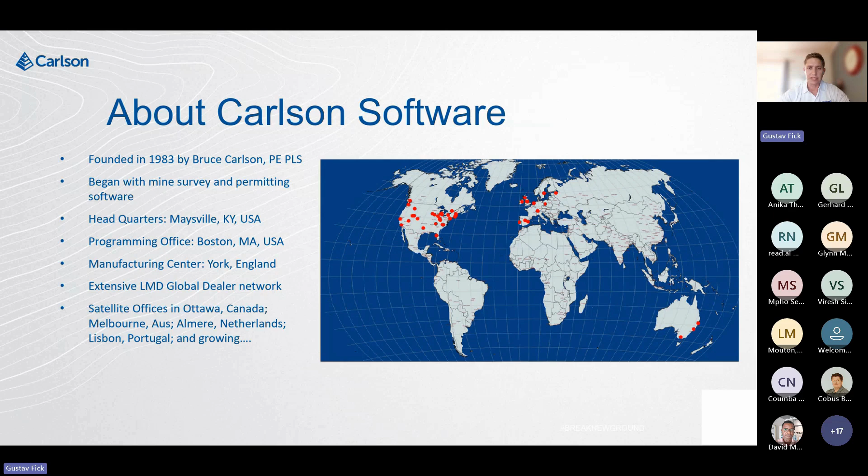We pride ourselves in having an extensive LMD global dealer network, of which we are very proud to be associated with Optron. And then we've got satellite offices scattered all over the world. The big ones are really in Canada. We've got an office in Melbourne, Australia, and then in the Netherlands, and Lisbon in Portugal. And hopefully in the near future, we will see some more growth here as well.

So the Quarryman Pro, it's still available. The Quarryman Pro has been around for quite some time, but it's still being used today, mainly in quarries and also on mine sites where long-range scanning needs to take place. And this is really the key feature with the Quarryman Pro. You're looking at about 1,200 meters that it can scan.

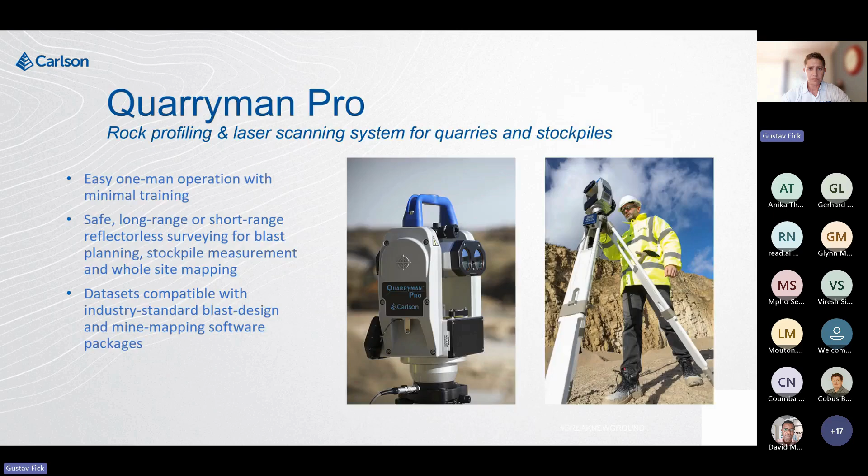The VS Plus, which is our Void Scanner, as most of you might know it, is typically used when you have an underground cavity and you need to map the cavity and work out what the volume is. What you do is you take the Void Scanner or the VS Plus, you mount it on a boom, and you deploy it into the cavity.

You can now georeference your scans by measuring the back and the front of the boom. So when you perform the scan, that data is already georeferenced if the data was available and it was measured prior to the deployment. You can also do it after, giving you some flexibility in terms of when you do your data capturing.

The big benefit really is having that data in real time. So after you've performed your scan, you can already calculate what the volume is. And I'm going to touch on that a little bit more when I get onto the C-ALS HD, because they basically use the same software, which is our Carlson Scan software package, where you can now interact with your data and then do the volumetrics on site in real time.

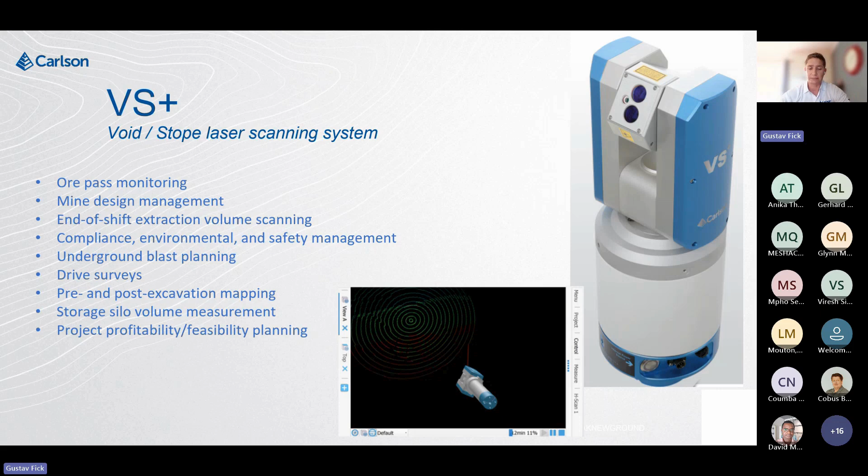So the focus products will be the Boretrak 3 and the Boretrak 360. The latest edition is the Boretrak 360, as you can see there on the right-hand side. These are our drill hole deviation measurement tools. We've learned a couple of lessons over the years when it comes to drill hole surveying, in terms of the use of it, what to do, what not to do.

And I would say this is definitely one of our flagship products, just purely because at the end of the day, mines need to measure what they drill, and depending if they're using contractors or doing it themselves, obviously the aim is to mine as close to the design as possible. And that's really what I'm going to touch on, just in general.

So what is a Boretrak? I've dotted a couple of points down. As I've mentioned, it's a drill hole deviation tool. It's mainly used on underground mines. It can be used on open pit mines as well; you've got different options in terms of deployment. Obviously with open pit, you will do downhole deployments. And if it's underground, you have the option of doing downhole, uphole, or side deployments also.

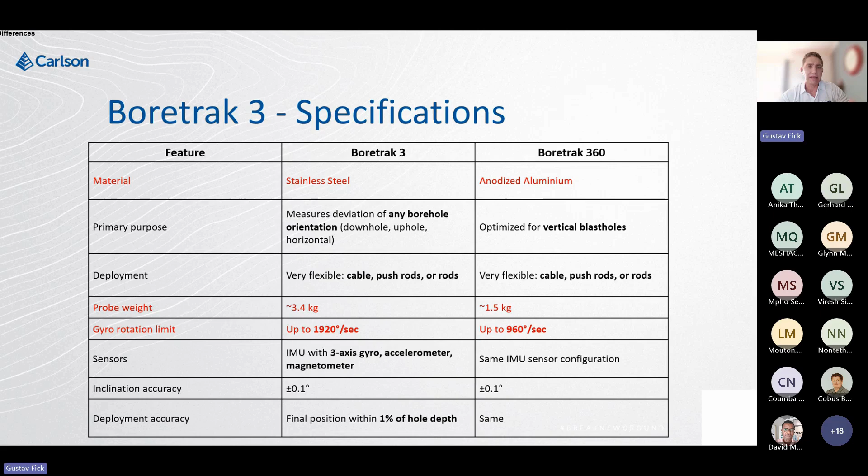So that's really kind of the big differences between the two. The big reasons, and that maybe just brings me to my next slide, my apologies for that. This is really where the big question is when to use which one.

So based on what I've mentioned, and I'm going to quickly just run through, the Boretrak 3, because of its IP rating and also the material, can really be used in all different environments. Where the Boretrak 360 can still do different deployment options, uphole or downhole. But the big thing is you need to be mindful of the environment that you're working in, and where you do the deployment, if production is really key, the Boretrak 360 really makes for a good option to use.

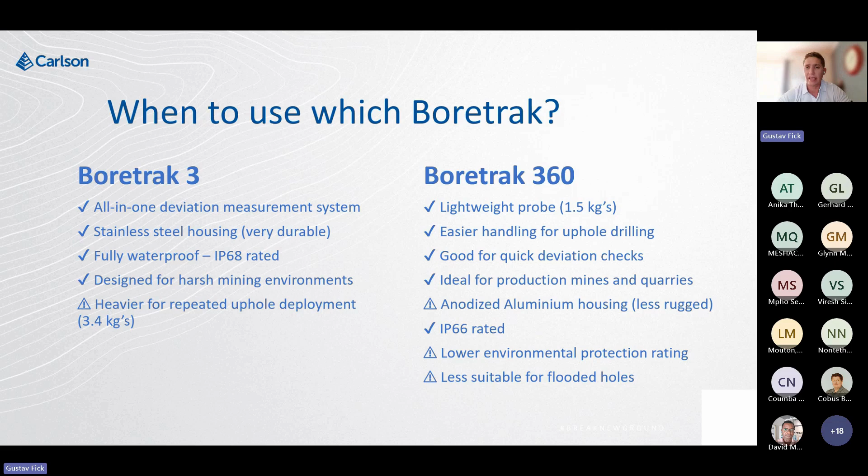So all in all, we've got different options depending on the environment that you're working in, depending on what your key focuses are. We really have a tool that will fit your needs. And this is really the big reason why we manufactured the Boretrak 360.

The typical deployment accessories, I'm going to start from left to right. On your left-hand side is your standard 50-meter cables for downhole deployments. You will see it's marked every meter. Then we move over to the rod stack. You still get the rod stack, downhole and uphole versions. The difference in the uphole version is that it's got hinges that lock, so that when you push it vertically, it doesn't bend. So that's the key difference between the uphole and the downhole rod stacks.

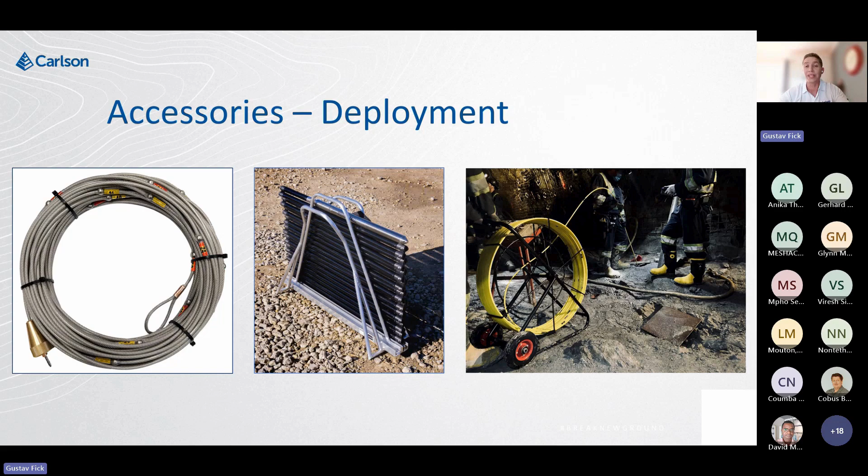And also we're seeing the demand picking up for the semi-rigid reels, where you can do uphole and downhole deployments, and especially linking this up with the BT360 makes for quite an easy to use system, compared to the Boretrak 3 with the rod stack. So these are the typical accessories, depending on how you want to do your deployments and the environment that you're working in, and this is typically how we would help and guide you to put together the best solution going forward.

Also, a topic that's not really talked about a lot is the need for centralizers. The reason for the centralizers is to avoid having the Boretrak zigzagging inside of the hole. So depending on the hole diameter being drilled, we have different options, centralizer bows that you put on your Boretrak. For example, if you have a 70 millimeter diameter hole being drilled, the rule of thumb is always to use the previous size that's available. So for a 70-millimeter diameter hole, opt for the GT10.

That will give you a total width of the probe's diameter, 40 millimeters, plus the spacing of the bows, which is 10 and 10, which gives you 20. So in total it will be 60 millimeters. You put that on, and then you do the deployment. This helps reduce that zigzagging effect inside of the hole. Also, what's important when you do your deployments and take your readings, which I will touch on in my next slides, is to make sure you keep the unit still.

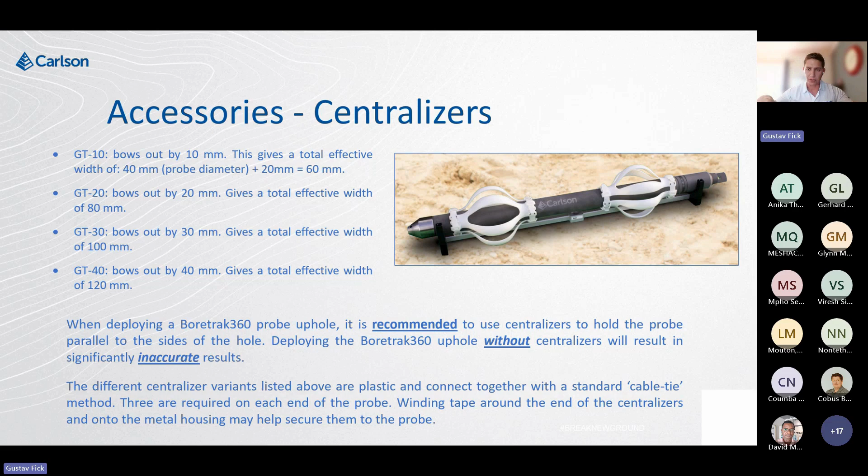The centralizers connect together. You can tie them with cable ties, and then off you go. Also, the rule of thumb is to use 3 on the Boretrak when you do your deployments.

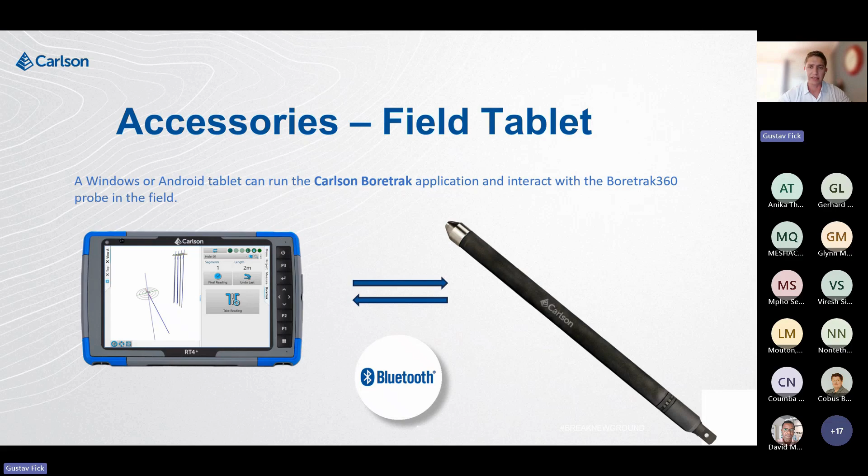Then the accessories: part of the system will be a tablet with the Carlson Boretrak software on. There's a Bluetooth connection between the Boretrak and the tablet. We've got options for Windows-based and Android. When you do your deployment and the Bluetooth connection is lost because of the deployment, as soon as you bring the Boretrak back within range of the tablet, the data will be uploaded. So that's typically how the communication is established between the tablet and the Boretrak.

Just to quickly touch on the field workflow, so that you get an understanding of how it works. Typically you would align your Boretrak to the collar position. If you've got a line of different holes, you can line it up with the front and the back collars. And I'm now especially referring to ring drill holes that need to be scanned.

So you can line them up, and then you can start with the aligning of the gyro. That will bring me to the next step. So firstly is just aligning it, keeping it basically on a stable surface. There you can see typically what the horizontal tolerance should be. You will align it. You will click on Align Gyro. It will take about 3 seconds to align.

And then from there on, depending if you want to continue and just capture the points or key in the front and the back collar positions to determine the heading to get your data georeferenced in the field already, you can do that. Or you can also do that afterwards, after you've done the data capturing. Once you're done with this, you can click on Finish. Once you've clicked Finish, the lights on the Boretrak will turn green, meaning it's ready to do the data capturing. And then from there on, you can start with your deployment.

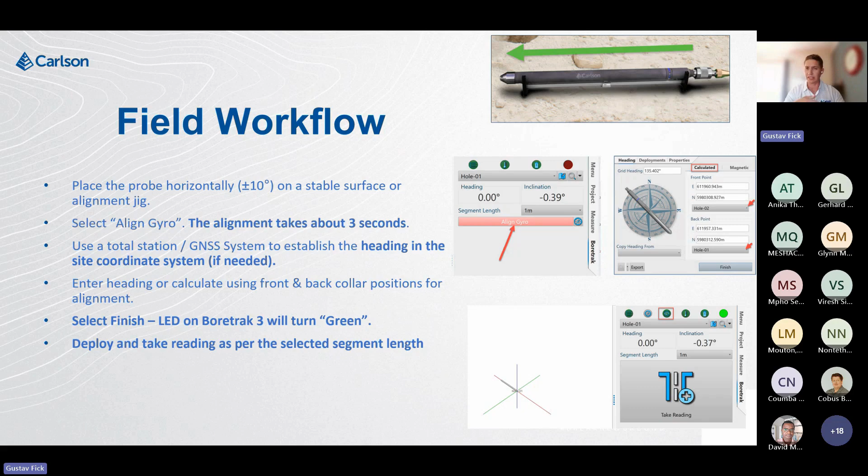So what's also important when you do your deployment, you need to specify the segment length. So if it's going to be 1 meter or 2 meters, and then you just basically deploy according to that. Just typically what you can expect and how the interaction with the Boretrak software can work.

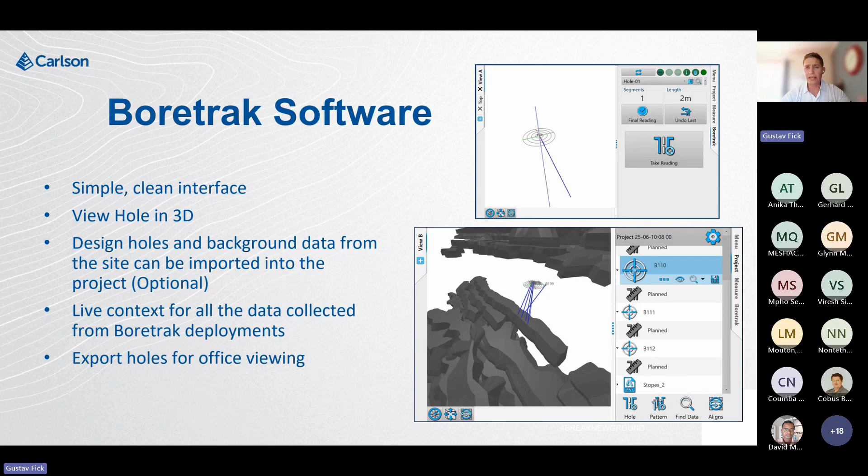This is where you can now import models. When you do the deployments, you can already see where the drill holes are drilled in relation to your models. You can import the designs also beforehand, before you actually go to the field, to already see what those deviations are. So really giving you a lot of flexibility in terms of data capturing.

The next thing also is when you've got point cloud data, and this is really more just from a QA/QC perspective, working with models inside of your Carlson Boretrak software. You can also import point cloud data if you need to just quickly see how your drill holes are lining up with your georeferenced point cloud. You can do that as well.

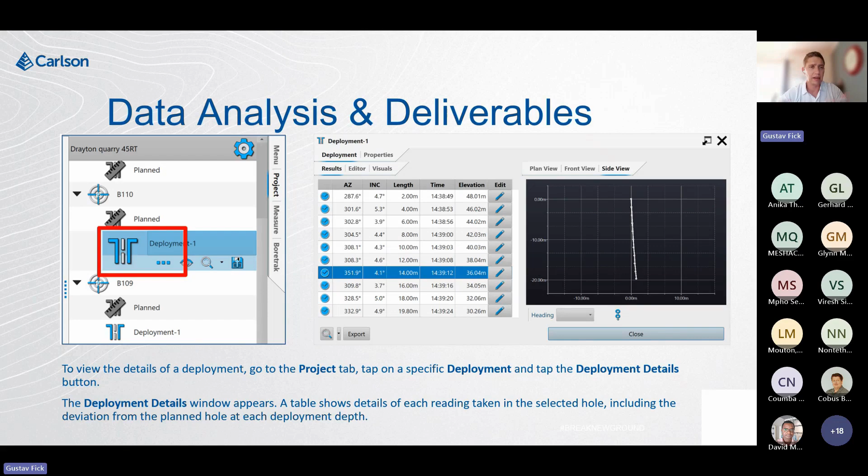Then once all of that is done, you can now perform data analysis and then generate your deliverables. This is typically just how you can interact with your different deployments. You can take hole for hole, just visually see what it is. This is also the step that you would follow if you need to key in the collar positions after the deployment was done. You can interact with the data like this and make the necessary changes before you generate your reports and then also your deliverables.

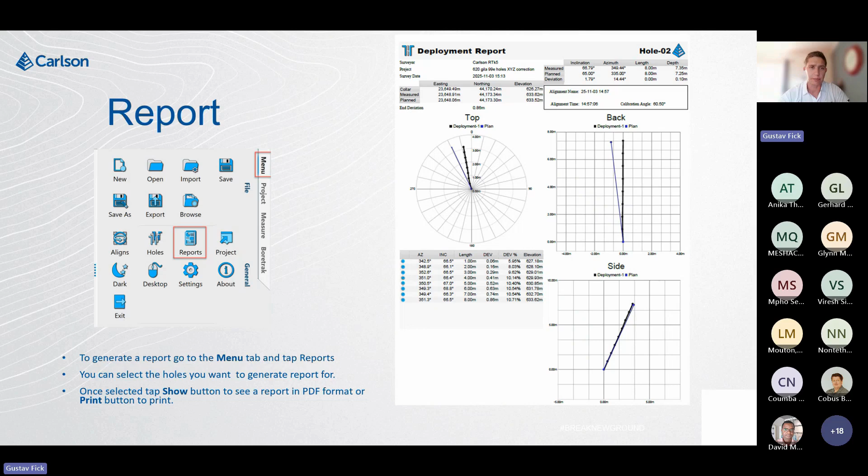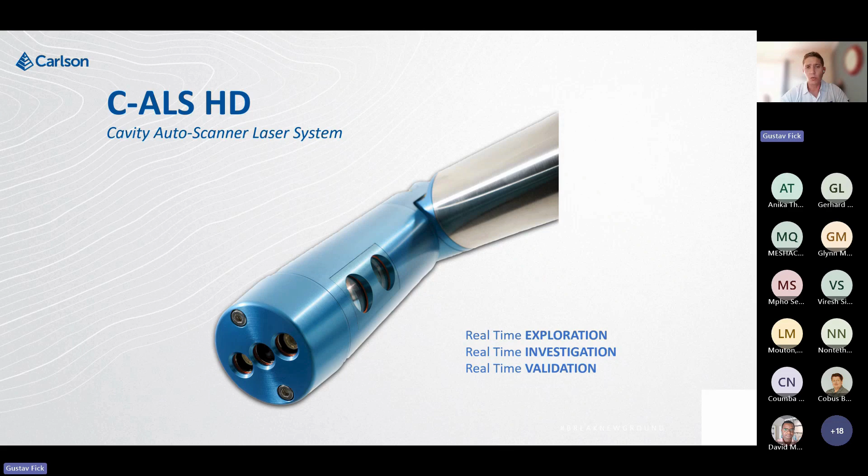Then the next product is the C-ALS HD. As you can see there, real-time exploration, real-time investigation, real-time validation. And this is when you have inaccessible voids that you cannot get access to. Let's say typically you've got a void underground, but you can get access to that void through drilling a drill hole, getting into that cavity.

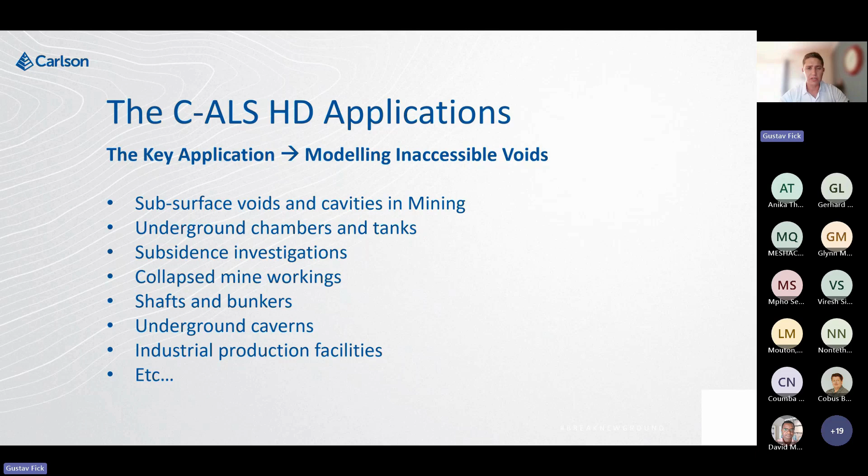Now you can deploy the C-ALS HD unit into that drill hole so that you can see when you enter that void and then perform the necessary scan work of that void and determine what the volume is. So this is just typically where a C-ALS HD would be used. Obviously, if you have cavities underground, you can do horizontal deployments as well. So you've got options. This is just to sketch a typical scenario when this would be used.

So I'm just going to quickly touch on, okay, what is a C-ALS HD? And once again, there's been a lot of different series of the C-ALS. Back in the Renishaw days, where it all started, we had different versions of the C-ALS. Now we've got the C-ALS HD. The HD is really that high definition camera that you have in the front of your nose cone.

But it's a scanner, it's got an inbuilt camera. It also has lighting capabilities so that you can see better what's happening underground. And it's got an IP67 rating. So this is just some of the key specifications that the C-ALS HD system basically comprises of.

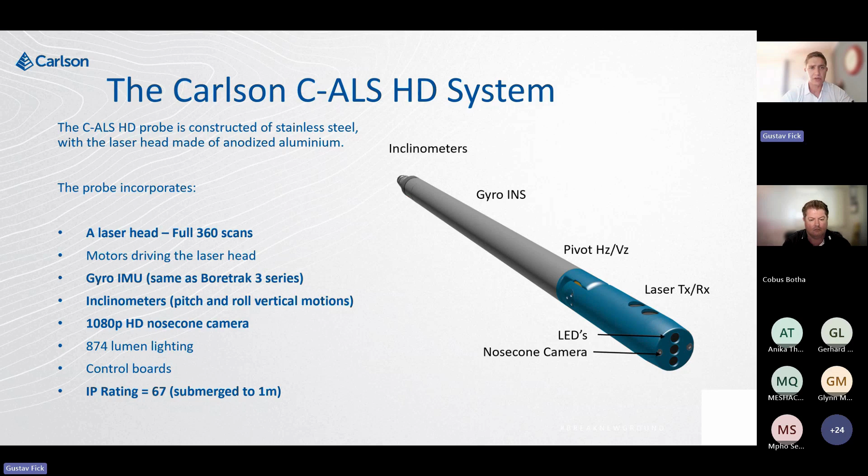Then I have a quick video that I just want to quickly touch on because this really explains it very nicely, and this is just to put some visual context to it. So if you've got that void, it doesn't matter in which direction it is. When I say direction, you can do uphole deployments as well, you just need to be mindful of the weight of the system. But you drill that drill hole, there you can see just the size of the diameter of the C-ALS.

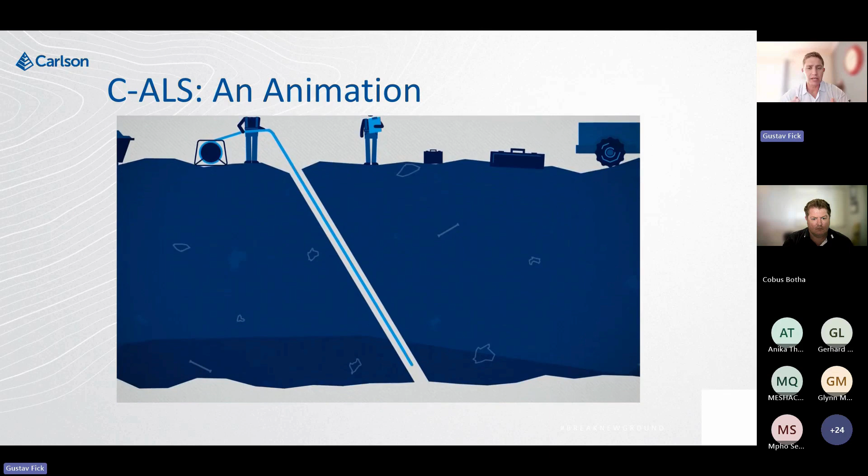You will deploy that in. It works very similar to the BoreTrak, the way of deployment, and it's got built-in BoreTrak technology as well, built-in IMU. So there you can see you deploy it inside of the cavity. It performs the scan, it maps it out, and then that's how you can start interacting with the point cloud data inside of the Carlson scan software.

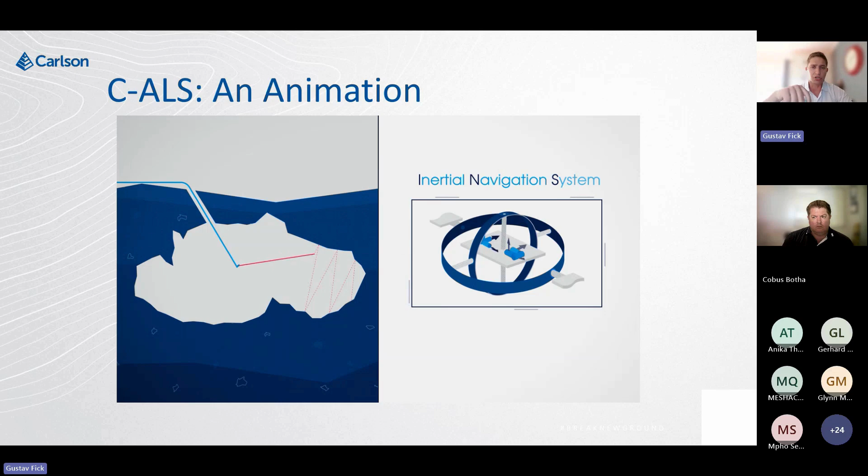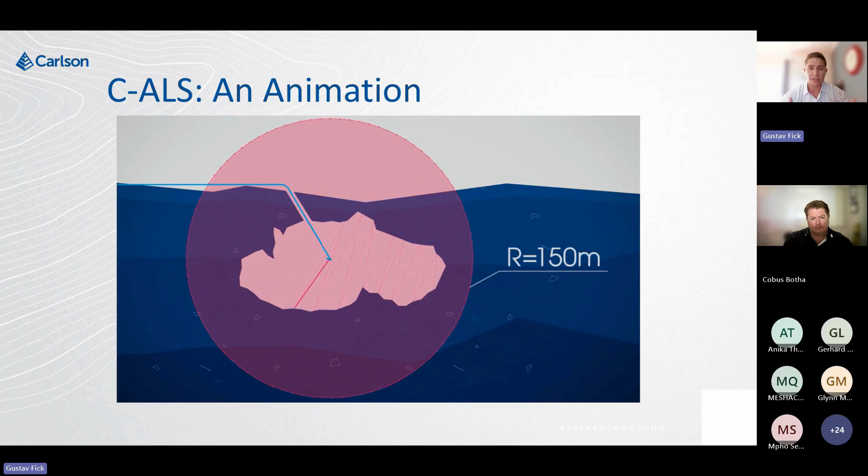So what it basically shows here is just how the scan works. You've got horizontal scans and you've got vertical scans that will now give you that full 360 view. Also something to be mindful of is blind spots. So depending on the size of the void, you might need to consider doing a second deployment. Once again, once you've done the scan, you will already have a good idea of what your next step should be.

Right. I think this really just covers what I wanted to touch on. The new accessories on our C-ALS HD: for those who are familiar with the C-ALS from previous use cases, you would pick up the cables, you don't have those markers on the cables, but those cables are still available. We call those our node cables, and this is the control cable, this yellow control cable here.

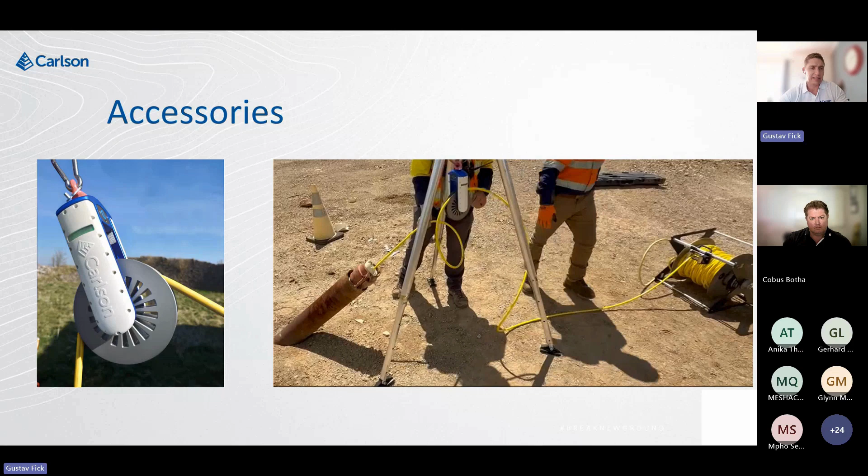But we've also introduced a deployment counter. What the deployment counter basically does, it works with a nodeless cable, what you can see on the screen. And this basically does the measurement for you as to how deep you are deploying. So the whole idea here is that it makes the data capturing process easier, where you don't have to remember which nodes you actually had to take the measurements on. So this is really a new way for us to make the data capturing process a little bit more streamlined.

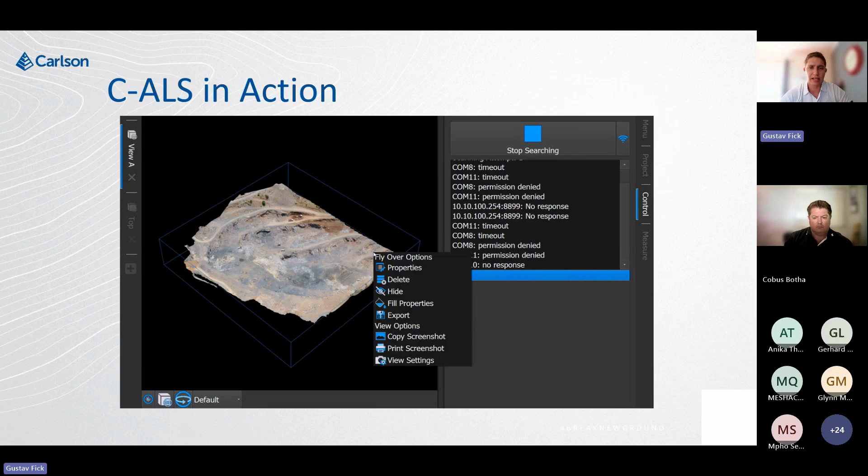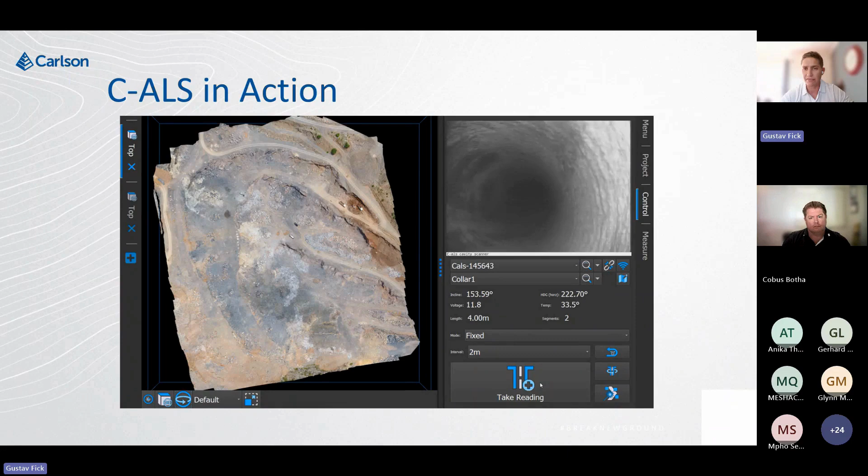Then my last one, before I wrap my part of the presentation up: how does it work? Typically when you need to do the actual data capturing, as I mentioned earlier, you've got a horizontal and a vertical scan that will give you the complete 360 coverage. So when you connect, it's connecting to the C-ALS HD, just doing a quick system diagnostic. This is typically what you would see here. That's the live feed coming from the nose cone of the C-ALS HD. So the nice thing is you can see and track what's happening.

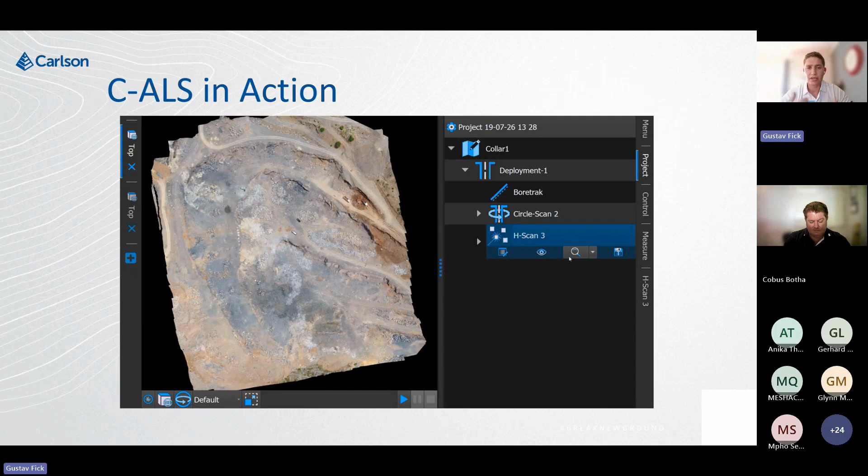When you get into that void, you will see when you're entering it, to prepare you for that scan. So this is just the different scans that have been done. You can now start interacting with that. What you see here is a point cloud that has been preloaded; you perform the scan, and then you can already measure your data to determine what the total volume is.

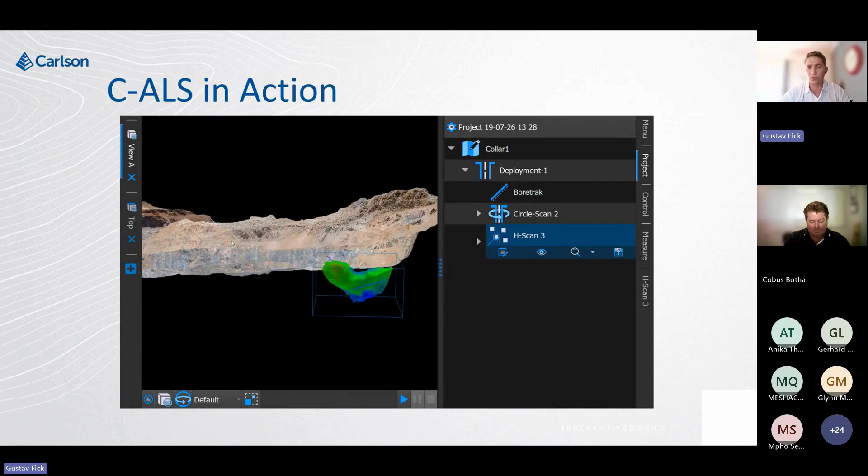Thank you. That's basically my part of the presentation. I'm now going to hand over to Cobus again. Thanks, Gustav. That was quite nice. And Paul, I'm going to hand over to you, and you can take us through some case studies, please. Yeah, thank you. Let's go here. Thank you, Cobus. Let me just share my screen. Can you see my screen? Yes, I can. Okay, thank you very much, and good afternoon to everyone.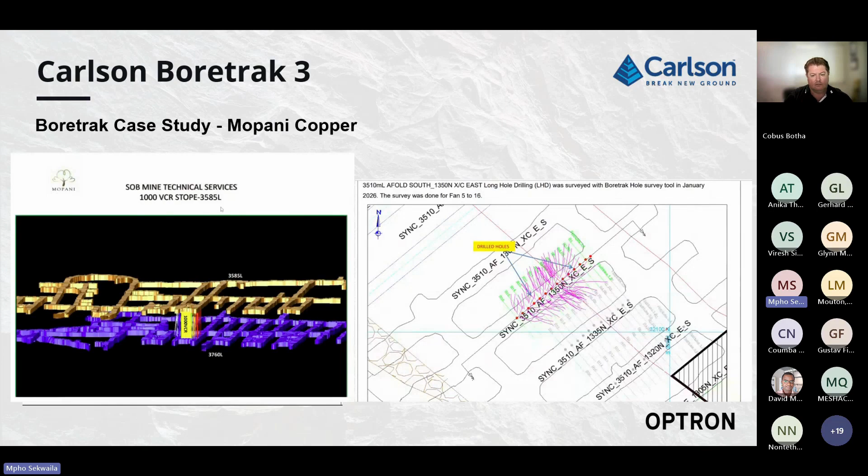As you can see on the right hand side here, they have the design in 2D. The green ones are the planned or the design, and the purple ones were the Boretrak hole as drilled, right? And as we move on, I'll go through those key benefits in detail.

The next one here, as you can see on the right hand side, they have a certain target of holes that they need to drill per month, per ring, right? And before they were just measuring with the tape, and the tape, yes, it is good enough when you measure. If they just say this hole is 50 meters, you deploy the tape, you got 50 meters. But you know, as we drill, we are not getting 50 meters per se. We still want those deviations, those millimeters, those trajectories, the geometry of your holes.

As you can see on this one, the planned meters per ring was 111 meters, but the actual drilled meters was 98.6 meters. So on this one, not to speak bad about others, but if you do your planning properly, and remember, you are paying per meters drilled per month or per ring per section per day. On this one, it means there was a shortfall of meters drilled.

And if you look here on the right hand side, you've got the outline blast line where everything, when it is planned, must be drilled to this blast line. And after the next slide, I will go through the impact of this one. If you look here, this one, they were under drilling. On this one here, they were over drilling and under drilling, which is not required. You have to be on par, nothing more, nothing less.

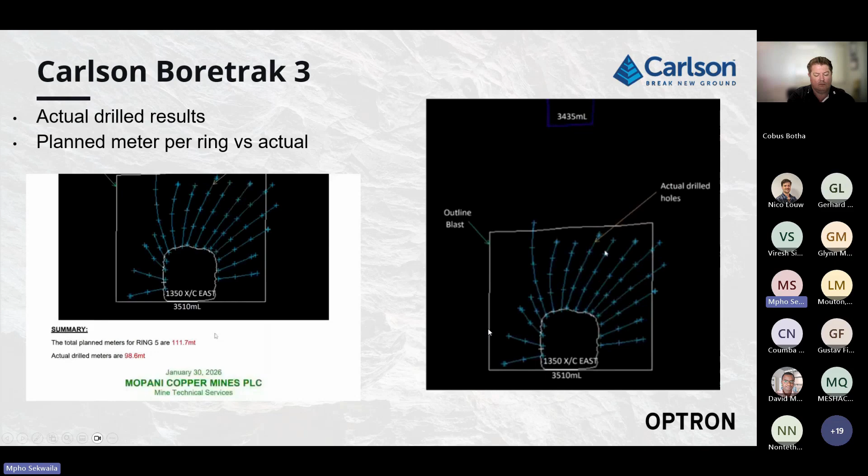Through this picture here, we've got two scenarios. The first one, the benefit of using this Boretrak and how it helped them: you can detect the problem areas. As you can see on the right hand side here, they did not drill up to the parameters set out. The planned one was 134, and this red line highlighted here will be one of the problem areas. And with the Boretrak, you can put preventative measures in place before you deploy the explosive.

And if you look on the right hand side, we've got areas where they've missed drilling this hole here, and we've got another one. Yes, they did not miss, but there is a gap because after a certain length, the geometry or the trajectory of the drill started drifting this side and this side.

And what will be the unpredictable results? If it is an uphole deployment, you might have hanging ground where it was supposed to be drilled. And on the right hand side, if it's over drilled, for argument's sake, say the reef was going along this side. Now if you over drill, after blasting everything, even the waste rock, will fall, which is not what is required.

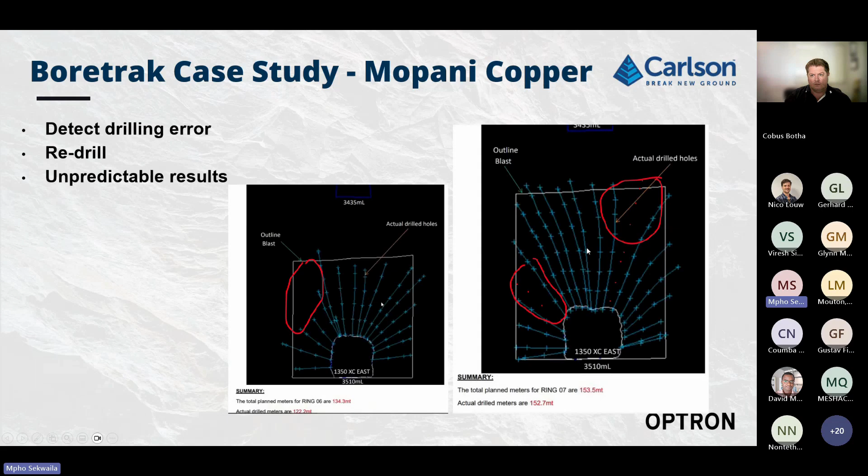Then on this one, if you check the pictures on the right hand side, the red ones are the drilled positions, and the rainbow ones are the planned ones. As you can see, there's just a red line. On this one, they've almost done a perfect job, but they still have a few things on this side, and on this side there were those under drilled. And what will be the impact? How will this impact your results or your productivity?

First things first, you will have uneven fragmentation. What do I mean by that? If everything is not blasted according to the design, your rock fragmentation will be too big. When they planned this design, they know if it's 2 meters or 5 meters apart per hole. The rock fragmentation might be the size of a tennis ball, but if we have scattered ones, we've got this one and they've missed this one here.

Now, after blasting, you stand a chance of having bigger rocks, which will delay you when you are picking the material, when you are loading the material, and it will even increase your rock dilution. When you've blasted, the rocks and the ore are mixed. When crushing, even when processing, it will take time.

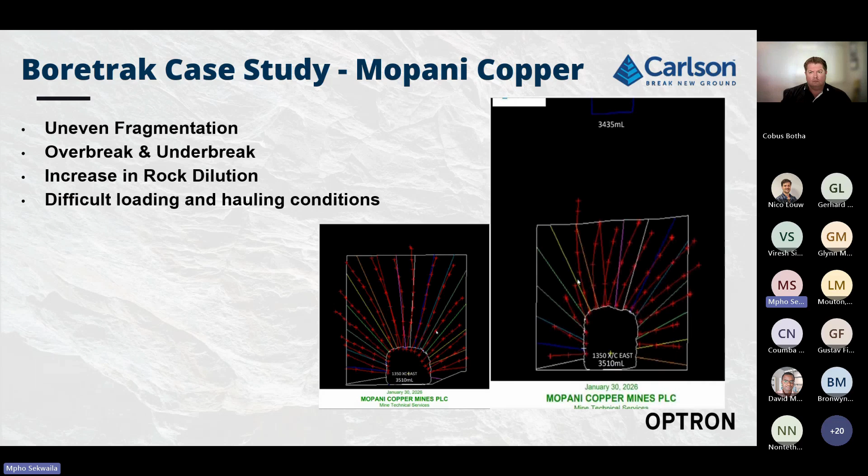Next slide. I'm just going to go through this report to demonstrate. On this one, the measured was 20 meters from the top of the collar to the bottom of the hole. And we've got the deviation, and the planned one was 16 meters. It means there was 3.5 meter deviation. The planned one was 16, but they drilled to 20 meters. So this will help you know how you can deploy, if you make a decision to go and re-drill next to it, or how you charge your hole, so that when you blast, at least there's a minimum.

In this case, let's assume you were doing 3 explosives per hole. On this one, because now you've got a length, you can decide, okay, let's do every 5 meters, not every 1 meter. Let's put one or 2 explosives so that it doesn't go above. In these pictures, I'm sure you're wondering, during Gustav's presentation he talked about the centralizer so that it doesn't move. This data was captured without the centralizer, hence it was moving in this zigzag.

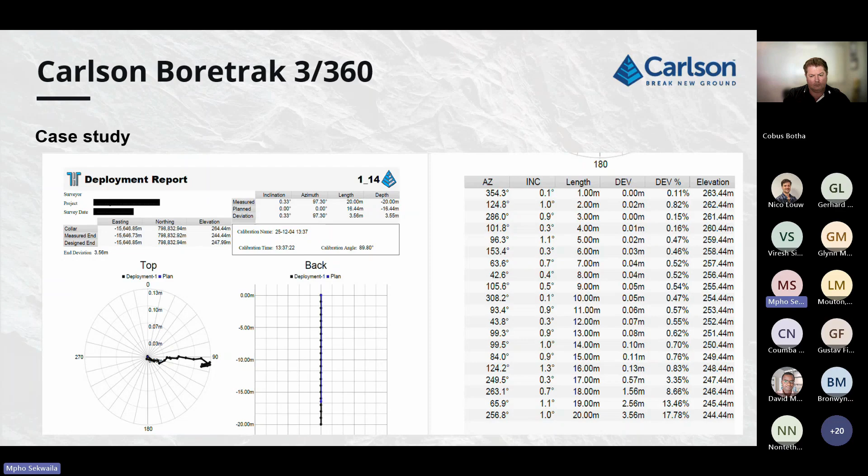Okay, what are the impacts of poor drilling and poor blasting? Normally, you'll have insufficient or uneven fragmentation. Like I've said, this will help us detect things early so that we can make a decision. And on the operational impact of the drilling, normally re-drilling is the best option, or adding another hole, so that when we blast we've got what was planned and drilled, and all the resources deployed are used effectively. Then operational problems caused by poor drilling.

Let's just assume on an open pit, we've got big machinery and they did not blast according to the design. You just say, okay, this one is fine, you can go. It will leave those hanging, all unstable ground. Once you deploy heavy machinery, they can sink in on that hole. But if everything is drilled to design, at least we know with this one we still have stable ground and it is easy to support.

It doesn't become unsafe. And this one will help you to reduce even the number of fatalities, so that you know this one here is according to design, everything is done to spec, then there will be fewer delays, which can help you.

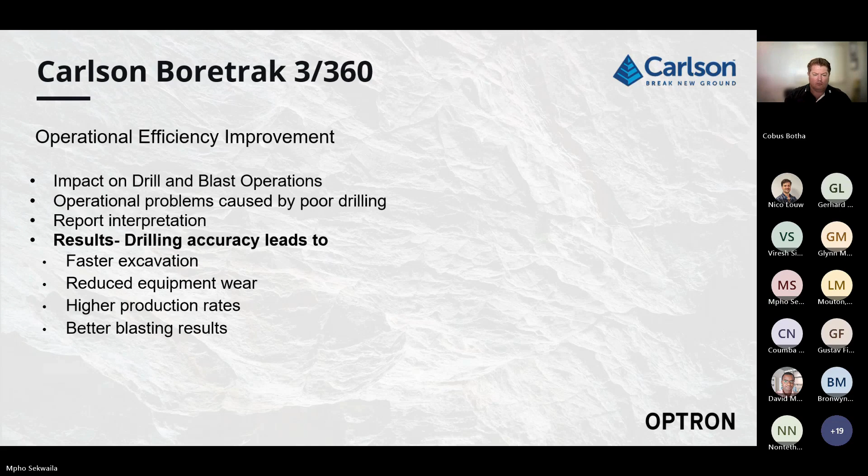Then if you go to operational cost, it will help you with your explosives. One ring, 10 holes, you might have 20 explosives, but if poor drilling is done, either you will need to increase your explosives, or if it's under-broken or under-drilled, if you still want to go with that one, instead of distributing 20 explosives you can say, okay, per this design, you can deploy 15 explosives. Now you are saving per this report.

And if I may just add the last point, because I went through this on the next slide, the cost saving decision. It can help you before you deploy anything, or before you go for blasting. You might go to the drillers and tell them, guys, let me just check one hole, and we check against the Boretrak, and we check if their drill is calibrated, because most of the time those things are not calibrated, which will require you to calibrate the machine and the Boretrak so that everything is still good. It will save you time, save your resources, and increase your productivity. Then all the resources will be well allocated.

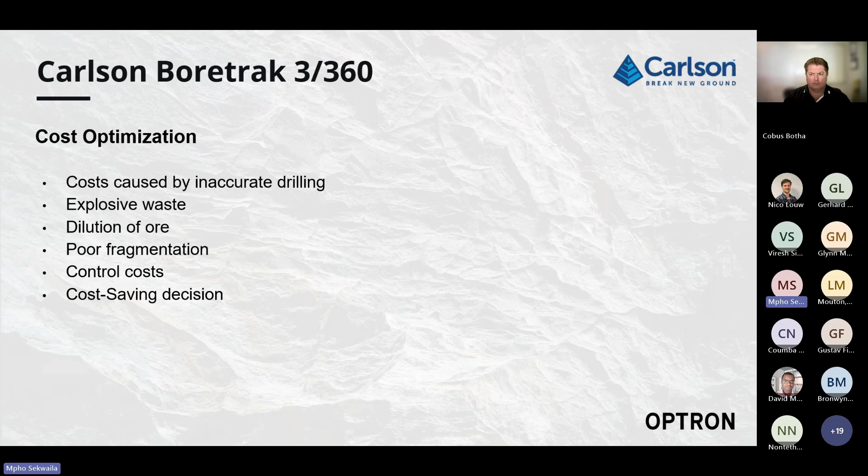Then on the Cavity Auto Laser Scanner, I was on the Boretrak. The C-ALS normally works the same as the Boretrak. The only difference is it's got the camera and it can scan the void. You deploy it the same way. Once you get to your cavity, that's where you can scan your cavity.

Then this one helps us to quantify the amount of backfill material that needs to be pumped in the areas you have scanned. Okay, we've got this much volume, this much material we need to fill in, so that you can support your ground. But if you don't have such information prior, then you find out that actually we did not fill the whole volume, we only filled 50% of it, which is going to cause production delays and everything.

With this one, you scan every hole and you've got a true point cloud, which will give you volumes and everything. The Boretrak and the C-ALS HD, everything is your reference. And you've got accurate point cloud data that you can visualize and make a better decision. As you deploy it, you will see the 3D visuals and the camera visuals of your scan data.